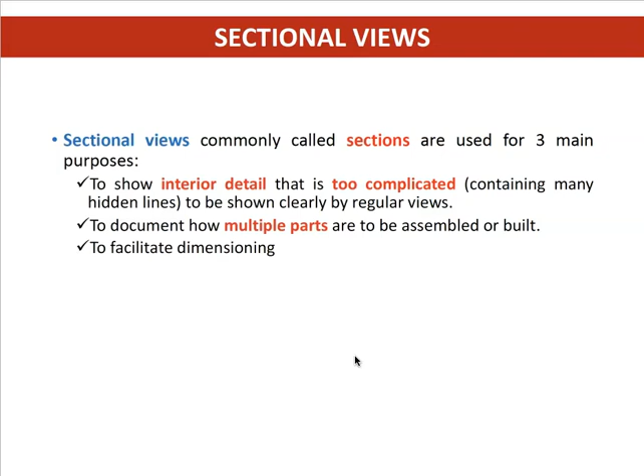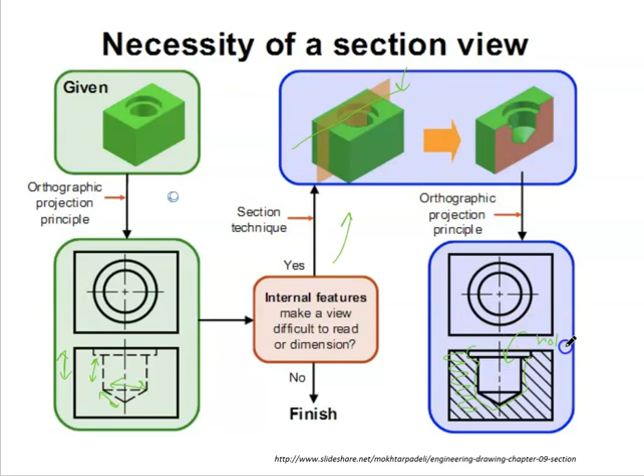So this is what you would get if you were to present the section view, and this is the orthographic view of a section. Here you can see they used hatching, which represents that this is not a hole, whereas the place where they don't have the hatching is actually a hole, or not filled.

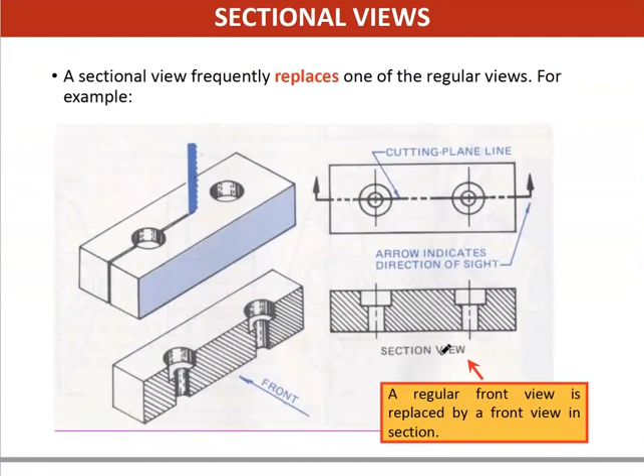A sectional view frequently replaces one of the regular views. We've seen this earlier on—for example, over here, we replace this view with a section view.

In this case, they have this object and want to present the section view because there's a lot of internal structures going on and you would only see hidden lines. Section view is an excellent way to represent the internal features and also for dimensioning. So this would be your front and this would be your top.

Here's how you would label the section view. It looks like a center line, but instead of just a center line, you would have the arrow, and the arrow presents your eye view. This is your line, and this is your arrow, which indicates your eye view, and this is the view that you would get, which is your eye view.

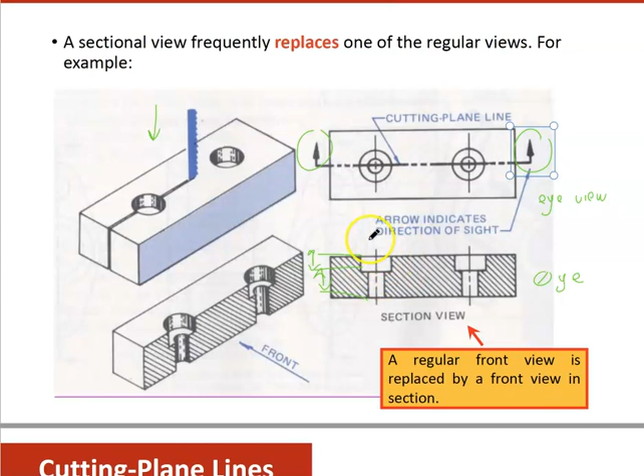So you see that there are a lot of internal features, and now I can do the dimensioning nicely. We're going to talk about dimensioning later on. So this would be the section view—remember, if you have a circle or something circular, you would have the center line.

So a regular front view is replaced by a front view in section, and then we have the cutting plane lines. As I mentioned before, to indicate your section view, you would have a line with arrows, and the line can be a thick center line or a thick phantom line.

A center line has this feature, whereas a thick phantom line would have two dots instead. Or you can also use a broken visible line—you would use this if your front view has a lot of features, and whatever features you have, you don't want to mess it up, so you use a broken visible line.

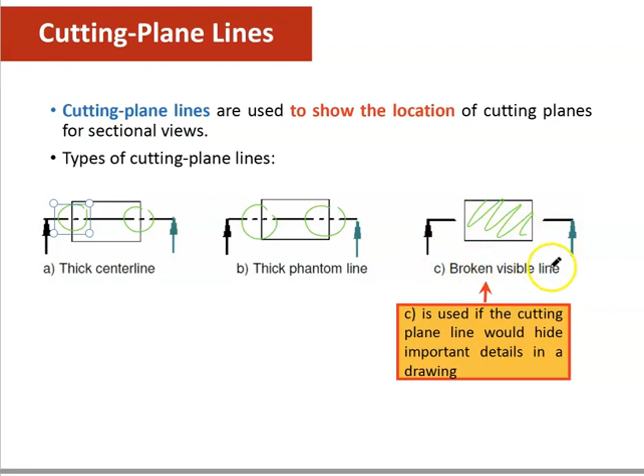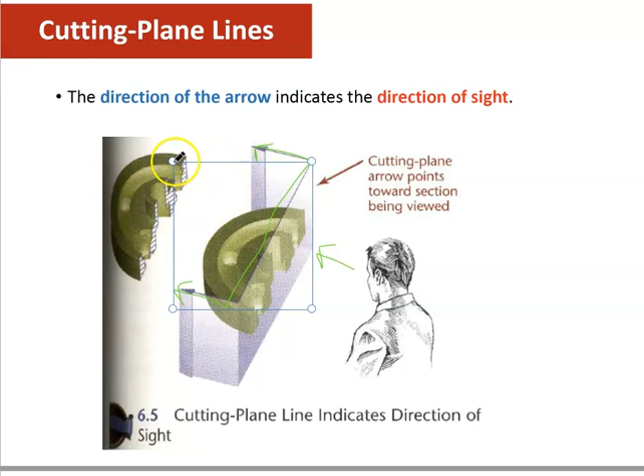So again, this is your cutting plane line, and this is where your eye view is. Let's move from here—this is what you're going to see. The cutting plane line indicates the direction of sight.

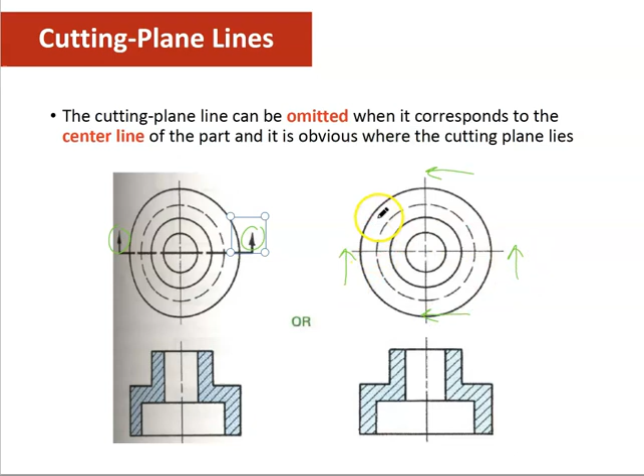So the cutting plane line can be omitted when it corresponds to the center line of the part, and it is obvious where the cutting plane line is. So for a circle or circular view, you know you have to have the center line, and if it's already overlapping the cutting plane line, you can just omit the arrows and proceed with your regular center line. The reader would know that even though there's no section line shown, there's a section, because the section line would be overlapping the center line. It could be from here or here, since they show the same thing, so it doesn't really matter. Now we were talking about cutting plane lines.

Now we're talking about section lining, which means how do you line the section. Section lining, sometimes referred to as cross hatching, can serve a double purpose: to indicate that the surface has been theoretically cut, making it stand out clearly and helping the observer understand the shape of the object, or to indicate the material of the object.

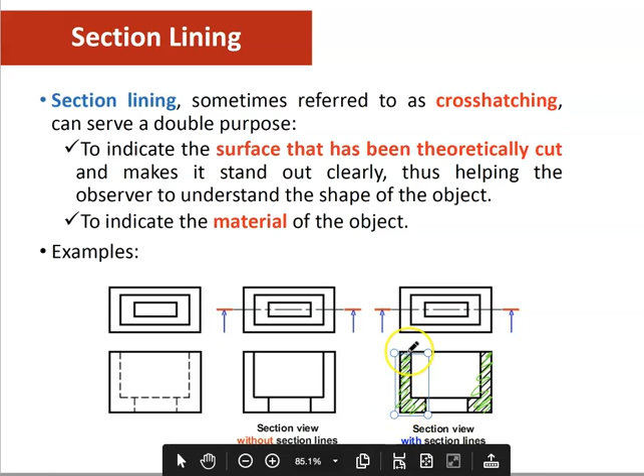So you have your regular view here. Here they decided to have the section line, using a thick center line with arrows. Instead of just presenting it like this, they have the hatching to clearly show that this side is not filled, whereas this side is filled with some material.

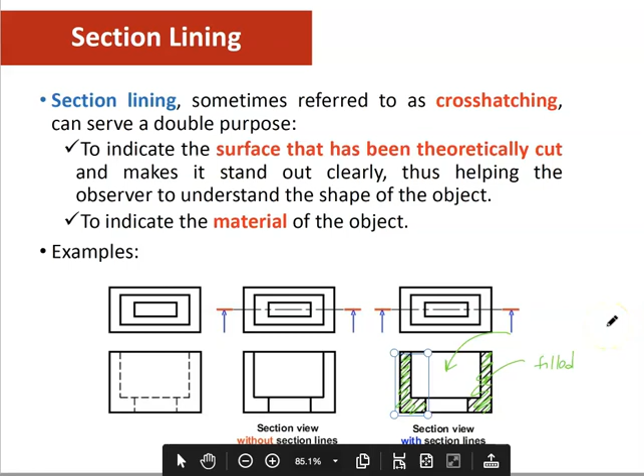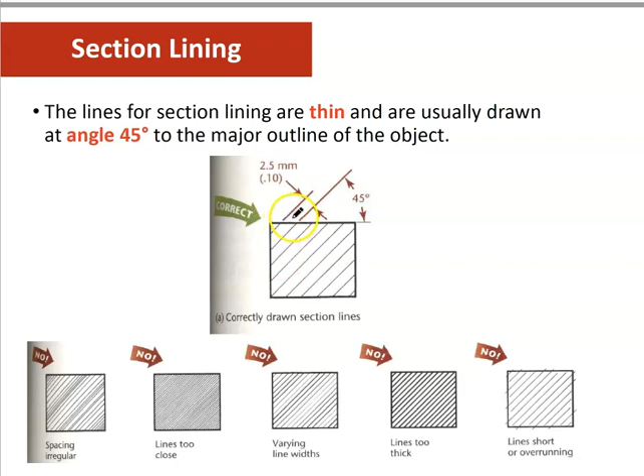The section lining has to be 45 degrees with your outline. So this is your outline, right? It has to be 45 degrees - it cannot be parallel or not 45 degrees. So these are examples of not good section linings.

Here we have spacing that is irregular, with lines that are too close - this is also not good. Varying line width is also not good. Lines that are too thick is also not good. And lines that are overrunning the outline - you can see these little lines extending outside the outline - this is also not good.

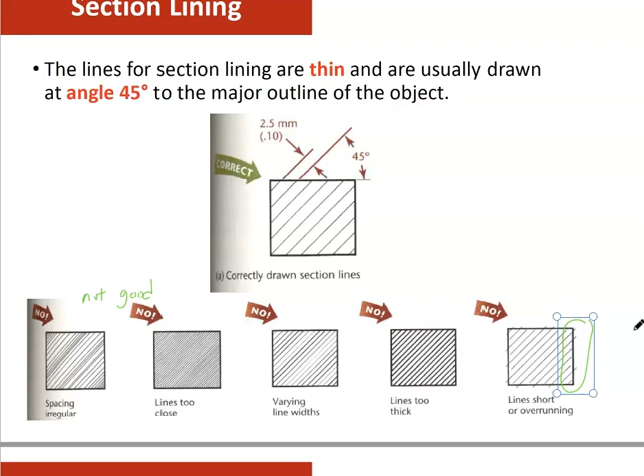So if the section lines you draw at 45 degrees with the horizontal would be parallel or perpendicular to the outline, then the angle should be changed to 30, 60, or some other angle.

So this is an example of me using 45 degrees with the horizontal. This is the horizontal, right? And I'm drawing 45 degrees with the horizontal for my section line, and you would see that it is actually parallel to the outline over here.

So we don't want something that is parallel or perpendicular to the visible outline. Therefore you would change the angle of your section lining to be 30 degrees or 60 degrees like this one. This is another instance - here you would see that it is 90 degrees, which is perpendicular to the visible outline, and this is what we don't want. This is parallel and this is perpendicular - both are bad examples.

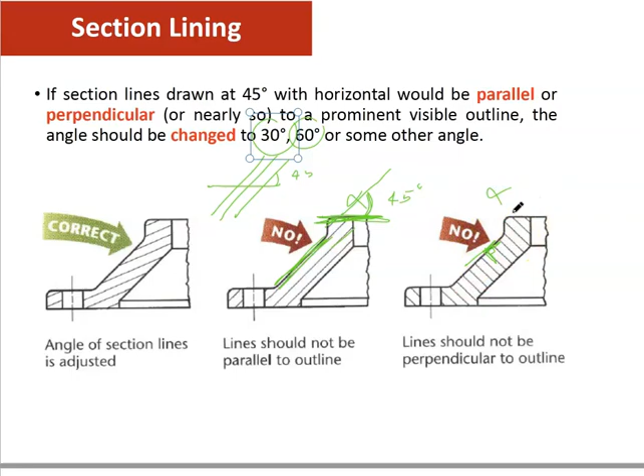Okay, moving on. How do we line the section? First of all, we talked about it should be 45 degrees, and sometimes we can indicate the material by following these symbols. For example, if it's just the regular 45 degree line, then it would indicate iron and general purpose use for all materials, which is what we used earlier on.

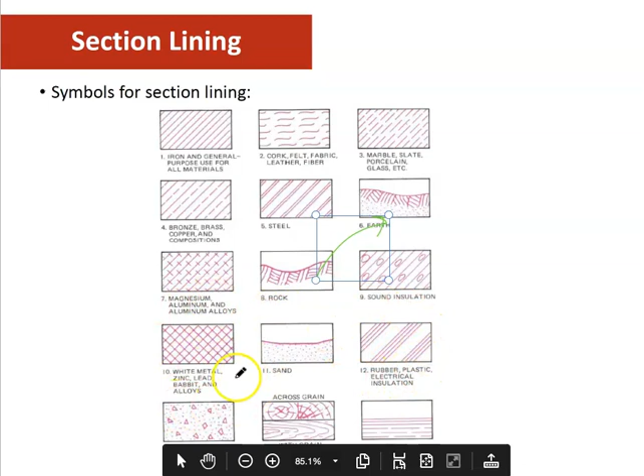And then for cork, you would use it like this. This is for marble. This is to indicate earth. This is to indicate steel, bronze, magnesium, aluminum, and aluminum alloy. And then this is rock - rock is almost similar to earth. You have sound insulation over here - if you're drawing something that is supposed to serve as sound insulation, you would use this. And then rubber, plastic, electrical insulation, sand, white metal, zinc, lead, babbitt, and also alloy.

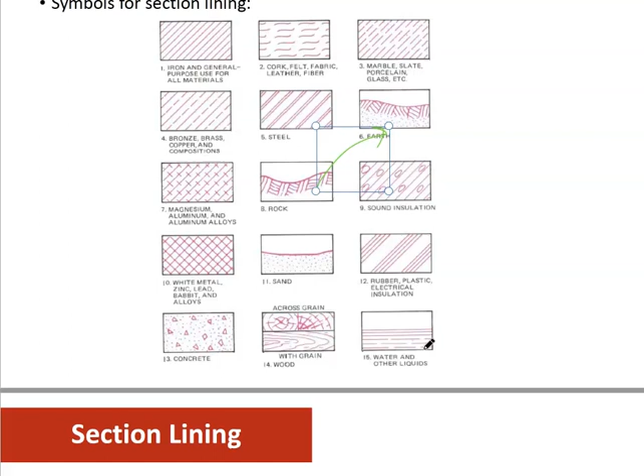And I can't see what this is - concrete with grain or wood. So this looks like wood, water, and other liquids. This is why you can't just use whatever symbols you like, because a certain symbol indicates a certain material. You don't want to confuse your audience or your readers.

And then section lining - sections that are too thin for effective section lining, such as sheet metal items. You have something that's really thin, therefore it may be shown without section lining, or the area may be filled in completely.

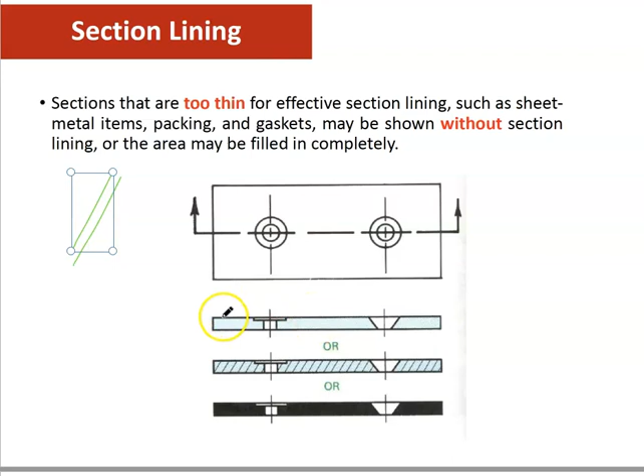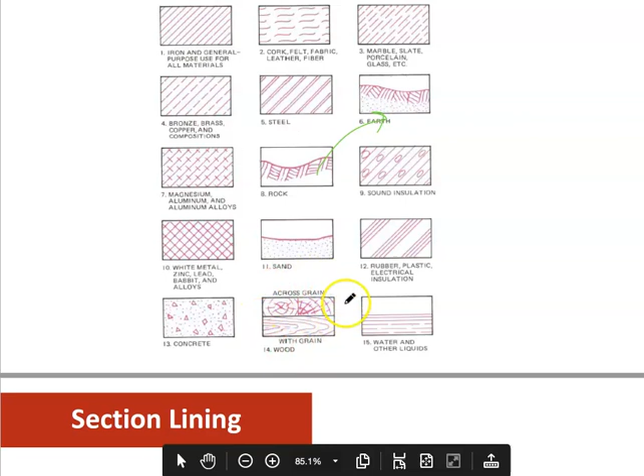So this is like super small. If you were to present earth or metal, let's see what is going to be complicated here. If I were to present the section lining with grain wood, or with sound insulation, it would be difficult to have that shown here, right? Because it has to have a certain size to use the section lining.

If it is too thin, as you've seen with your center line, if your object is too small, the center line doesn't show up properly. Same case for section lining. If it's too thin, the lines won't appear correctly. For example, sound insulation would only show you part of it, and you'd wonder why your section lining has a hole. It becomes a little weird. So instead of using section lining, you can just fill it in completely and indicate it in your note, or use the symbol as is and hope your reader isn't confused.

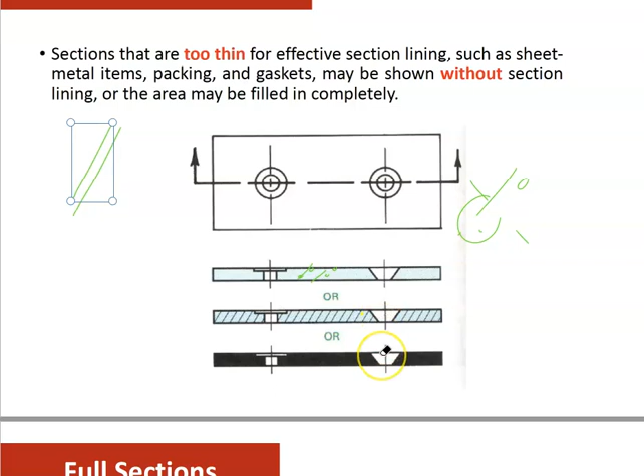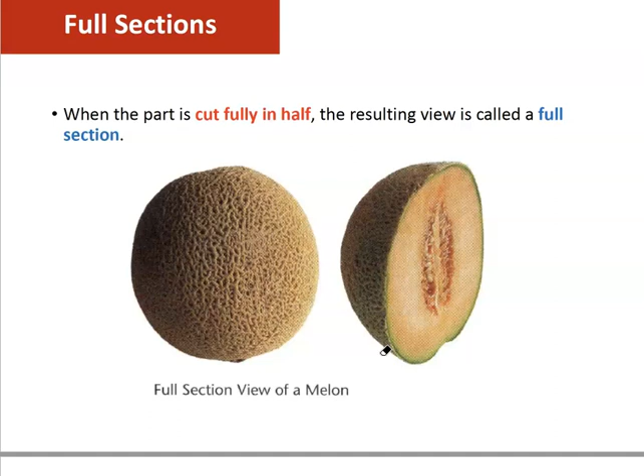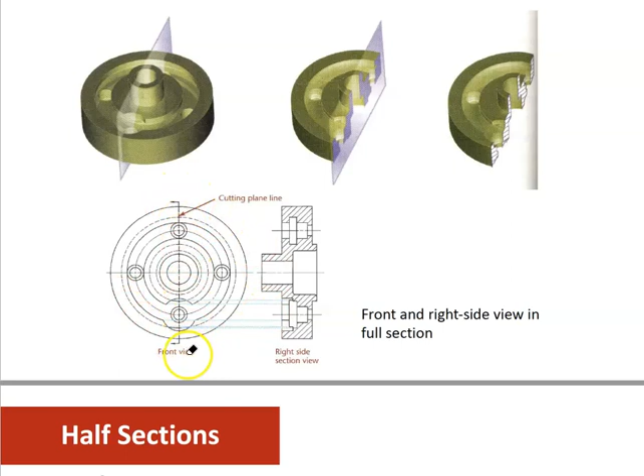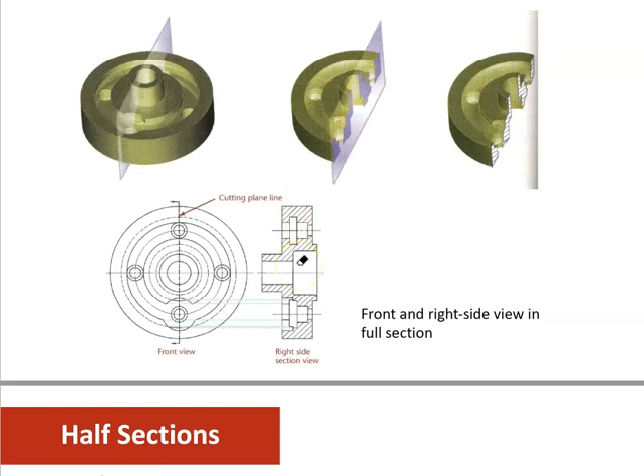So what is a full section? When a part is cut fully in half, the resulting view is called the full section. This is what we've seen so far - cutting completely across the object. This is your front view, with your thick center line and arrow indicating your eye view. This is your cutting plane line, and this is what your section view would look like with section lining at 45 degrees, the general multi-purpose section lining.

So this is half section. Half section is a view of an assembly or object, usually symmetrical, showing one half of the view in section. Instead of cutting it completely, you cut it as half of the full section. A half section exposes the interior for one half of the object and the exterior for the other half.

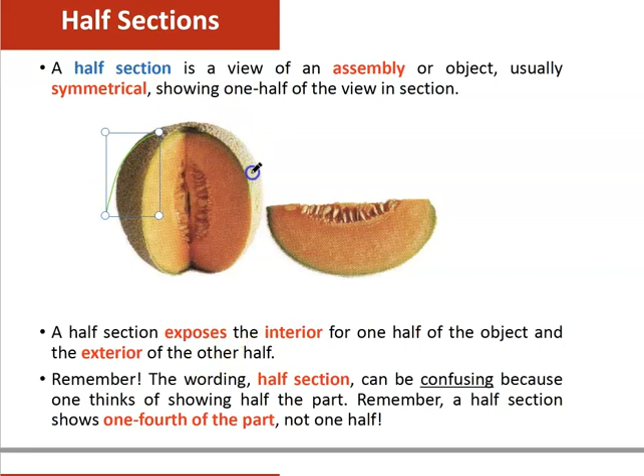This is when you want to show the outside of your object, because it's important to show it - if it's not important, you don't need it. Remember, the wording half section can be confusing because one thinks of showing half the part. Actually, a half section shows 1/4 of the part, not half. Half is basically the full section, and 1/4 is basically the half section.

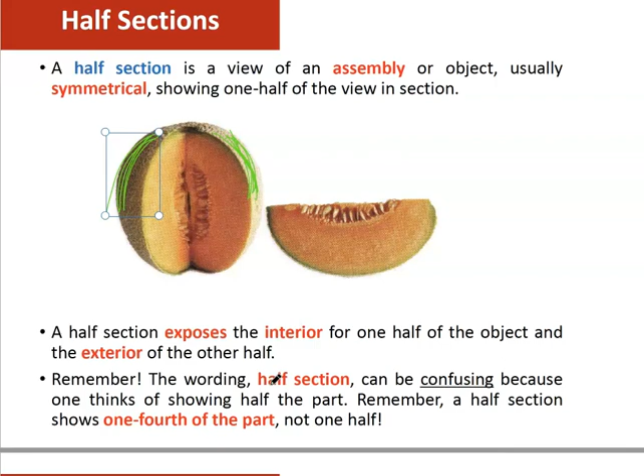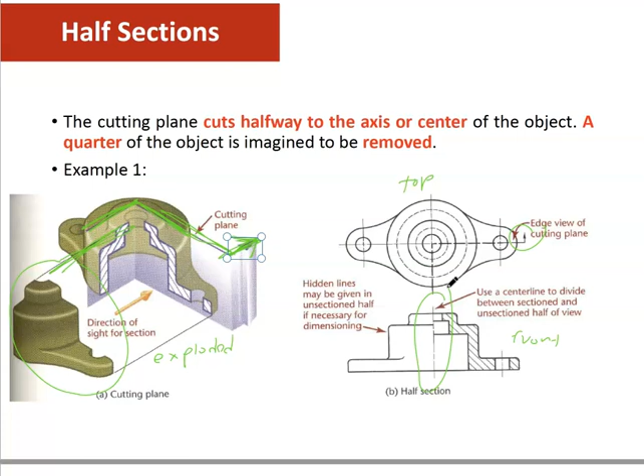So basically half of it shows you the internal features, the other half gives you the external features. Hidden lines may be given in the unsectioned half, or if necessary for dimensioning, use a center line to divide between the section and unsectioned half of the view. Here they are using the center line to indicate there are 2 sides to the view - one is section and another unsection.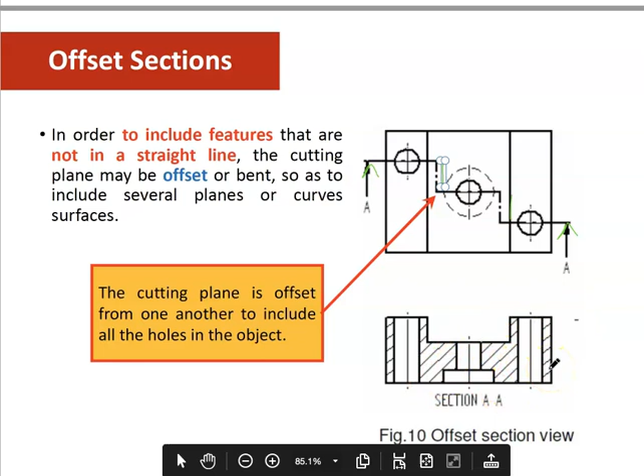Another example of offset sections - here you have holes here and here, and holes over here and here, and basically they are not aligned in a straight line. If I were to draw a straight line, they don't follow it because they are everywhere. So you can indicate your section, your cutting plane lines like this, with your offset, and this is your direction of eye, and this is what you would get for your section view.